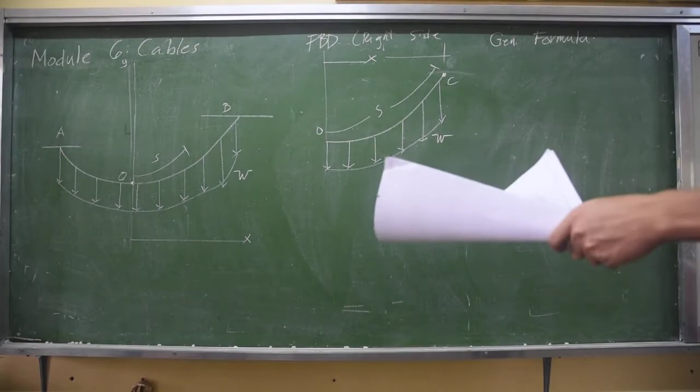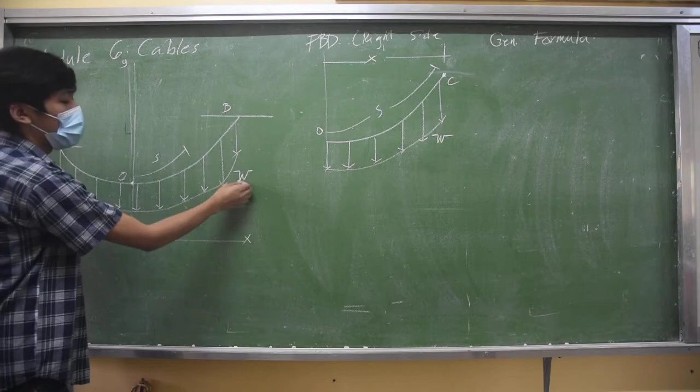Assuming A and B are your supports, where the cable is attached. The W here is the load or the weight of the cable it's carrying, a linear load W. S is the length of the cable - remember, S is the length of the cable. X is the distance of the cable along the horizontal.

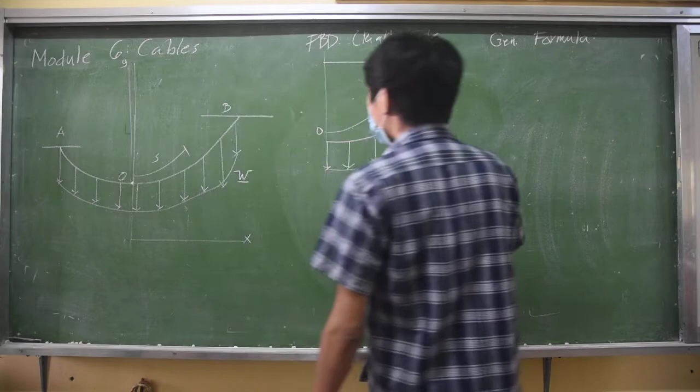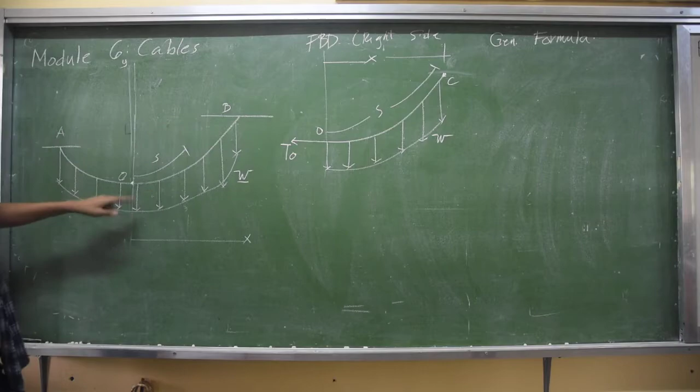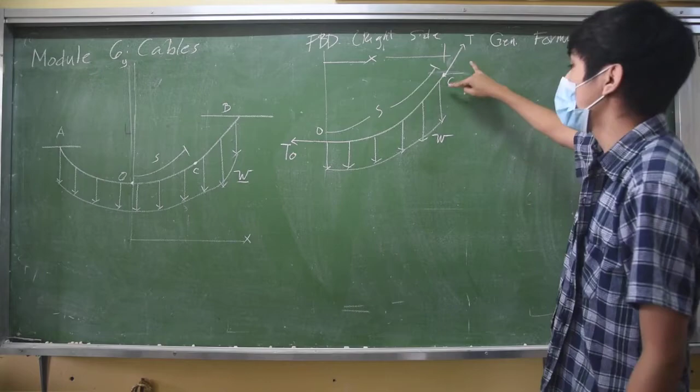Since this is a cable, according to module 3, a cable only has the capacity to develop tension. And since it's inclined, it has a certain angle. Since this W could be WX, but let's say it has a concentrated load, let's make this small w a single concentrated load, capital W. Remember, this linear load is in terms of Newton per meter or pound per foot.

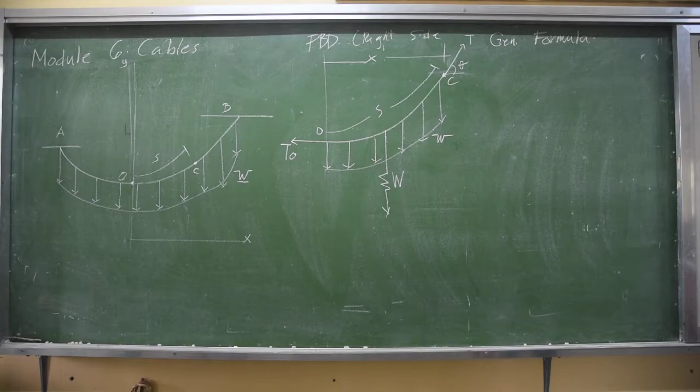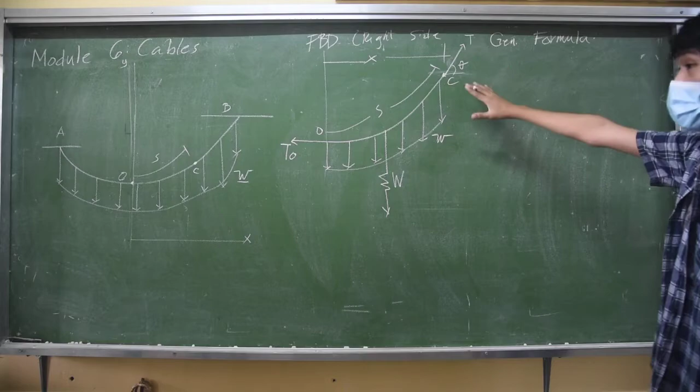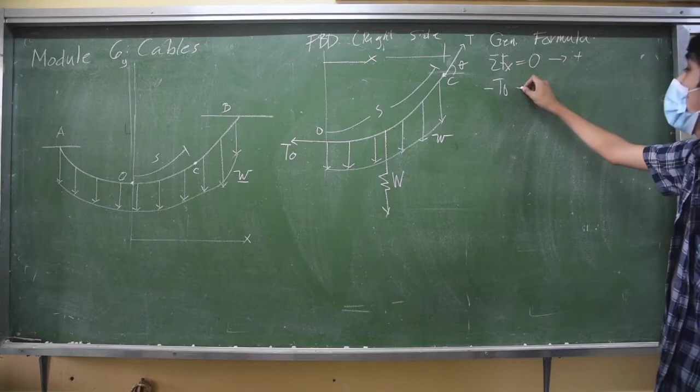Now let's make formulas based on our FBD. Of course this should be in terms of equilibrium. Summation of forces along X equals 0, with right as positive. So TO is negative, then plus T cosine theta equals 0.

So TO is equal to T cosine theta - that's one formula. Next, summation of forces along Y equals 0, with upward as positive. So we have T and the weight only. T sine theta minus W equals 0. So W is equal to T sine theta.

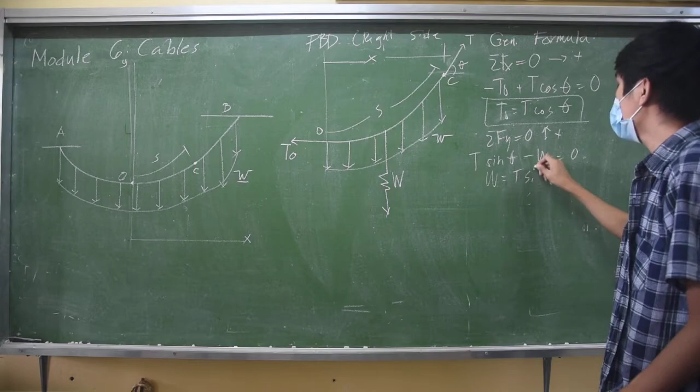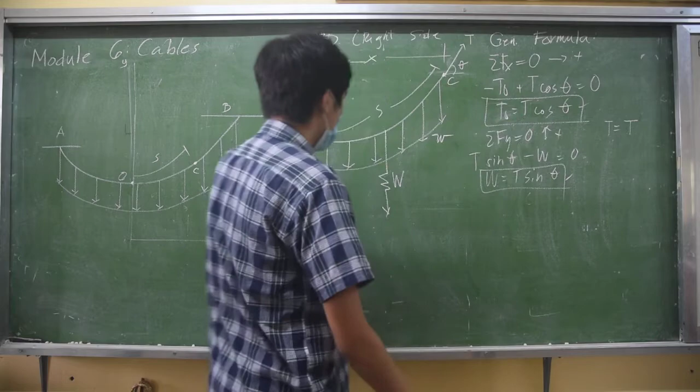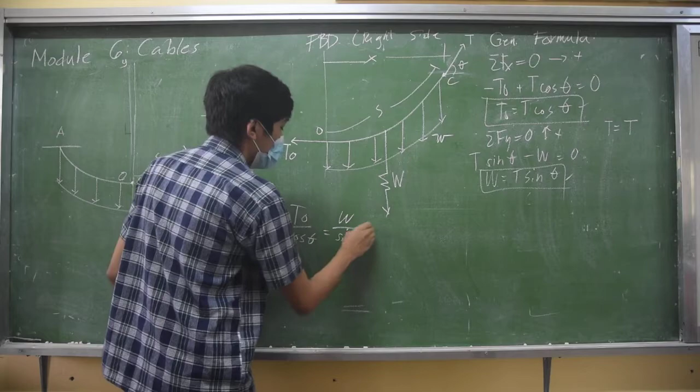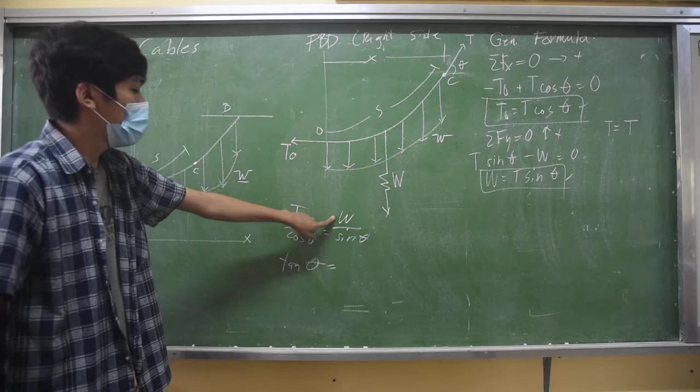Then we can get T using these two formulas. Let's combine them into a single T: TO divided by cosine theta equals T, and this equals W divided by sine theta. Cross multiplying, sine divided by cosine is tangent theta, equal to W over TO, to get our angle.

If we make a triangle from this tangent, this is our theta, this is W and this is TO. So this must be our T. Since it's the single resultant, T is equal to the square root of W squared plus TO squared.

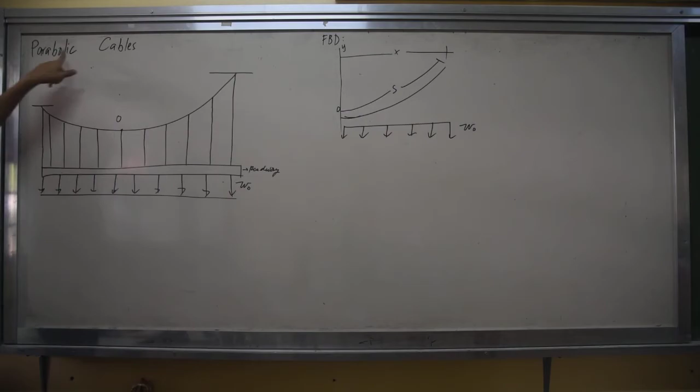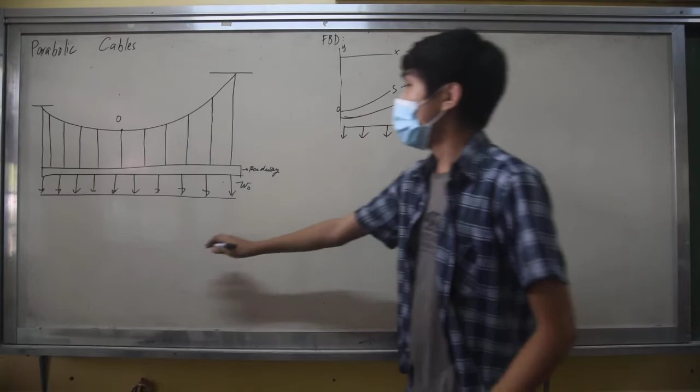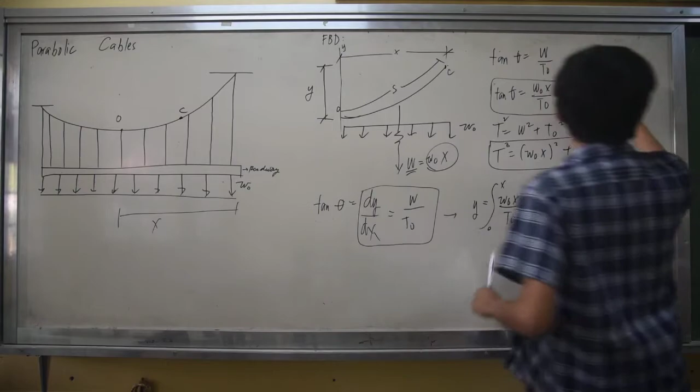So you can write it this way: S equals the integral from 0 to x of the square root of 1 plus the quantity WOX divided by TO, squared, dx.

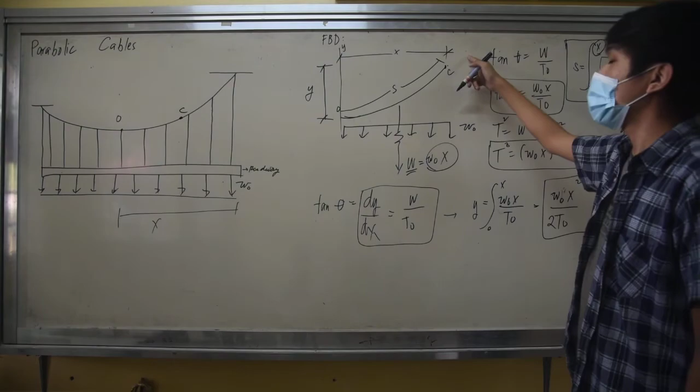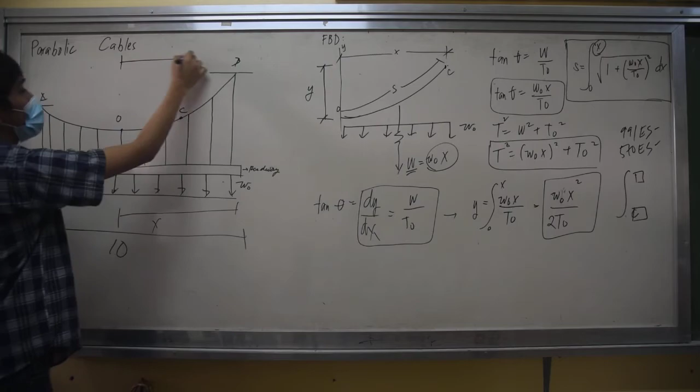The x referred to here is from your lowest point up to your given point. For example, from A to B, let's give it a length - say 10 meters. From O to B, let's say the distance is 6 meters, just assuming. So what you input here for x is 6, measuring the length from 0 to 6. Remember, x is your horizontal length and S is your cable length.

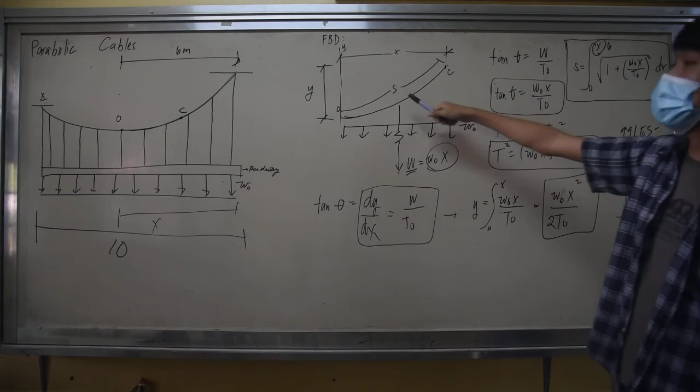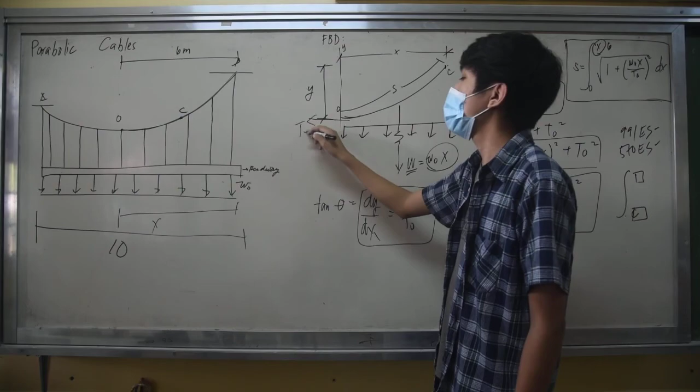So, to summarize: w0 is your linear load, x is your horizontal length, and T0 is your tension at your lowest point. Next is a sample problem.